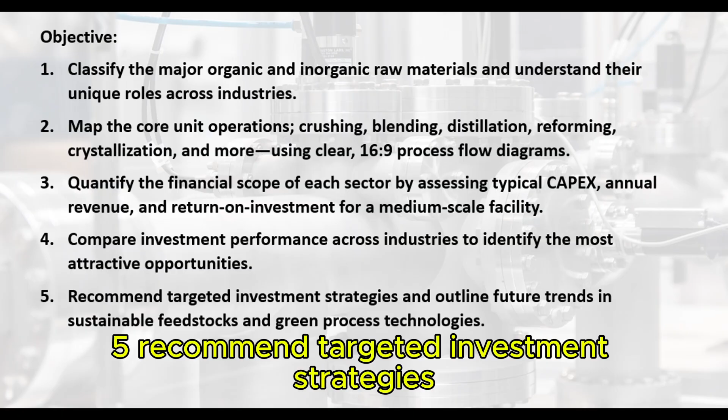3: Quantify the financial scope of each sector by assessing typical CAPEX, annual revenue, and return on investment for a medium-scale facility. 4: Compare investment performance across industries to identify the most attractive opportunities. 5: Recommend targeted investment strategies and outline future trends in sustainable feedstocks and green process technologies.

By the end of this video, you'll have a holistic understanding of both the chemistry and the economics that turn raw molecules into multi-million-dollar ventures, and the insights you need to make informed investment decisions in these critical sectors.

Expected core areas covered in this study are as shown in the outline below: 1.0 Raw Material Classification. 2.0 Agrochemicals Industries. 3.0 Petrochemicals Industries. 4.0 Cement Industry. 5.0 Food Industries. 6.0 Petroleum and Natural Gas Industries. 7.0 Evaluation of CAPEX, Revenue and Return on Investment of Industries. 8.0 Investment Strategies. 9.0 Conclusion and Future Outlook.

1.0 Raw Materials Classification. Raw materials are also known as feedstocks. Raw materials are the fundamental substances, natural or synthetic, that are introduced into a process to undergo chemical transformation. Raw materials could be classified into the following two classes.

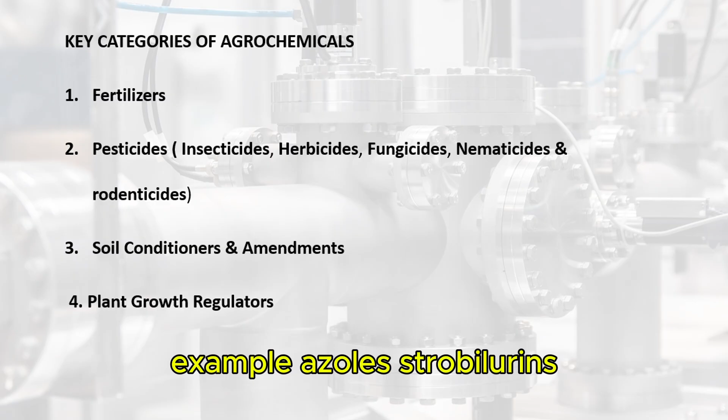2. Pesticides, grouped into the following. A. Insecticides control insect pests, e.g. organophosphates, pyrethroids, neonicotinoids. B. Herbicides suppress or kill weeds, example glyphosate, atrazine, 2,4-D. C. Fungicides prevent or treat fungal diseases, example azoles, strobilurins, copper compounds.

D. Nematicides and rodenticides target nematodes in soil and rodent pests. 3. Soil conditioners and amendments include: A. Lime (CaCO3) and gypsum (CaSO4), to adjust pH and improve soil structure. B. Organic amendments - compost, biochar, manure - to boost microbial activity and water retention.

4. Plant growth regulators. These are hormone-based chemicals that modify physiological processes: auxins for rooting, gibberellins for stem elongation, cytokinins for cell division, ethylene inhibitors. This section will be focused on the process of producing fertilizers.

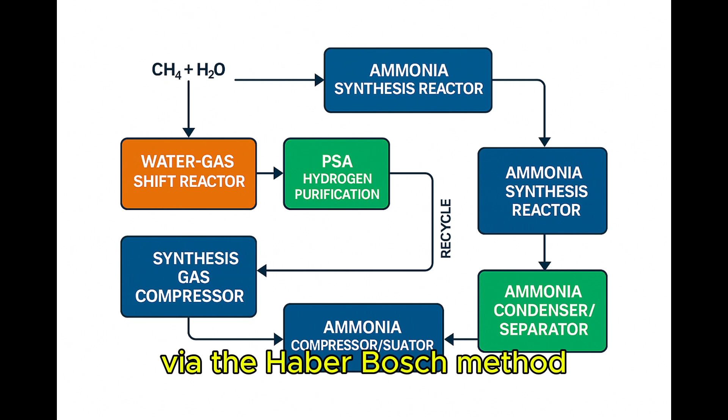2.1 Production of fertilizers. Production of fertilizers starts with the production of ammonia. In this study, we will consider the production of ammonia via the Haber-Bosch method. The process flow diagram here illustrates the production of ammonia via the Haber-Bosch method. Here's a concise breakdown of the key steps involved in the Haber-Bosch process for production of ammonia.

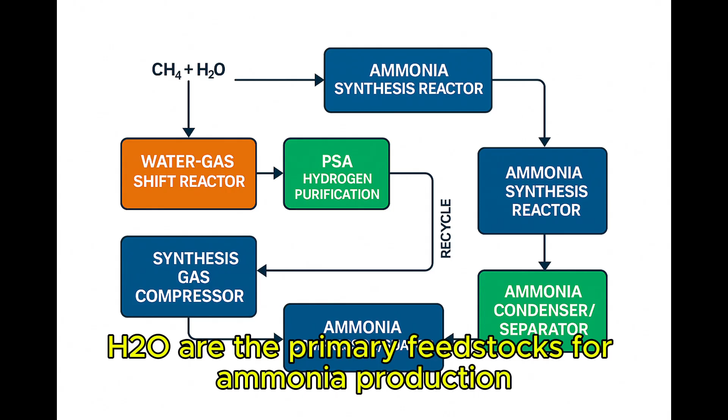Step 1: Feedstock preparation. Methane (CH4) and water (H2O) are the primary feedstocks for ammonia production. Methane is often derived from natural gas. Step 2: Water-gas shift reactor (WGS). Methane and water produce hydrogen gas and carbon monoxide as shown in reaction equation 1. This reaction helps produce hydrogen, H2, which is needed for ammonia synthesis.

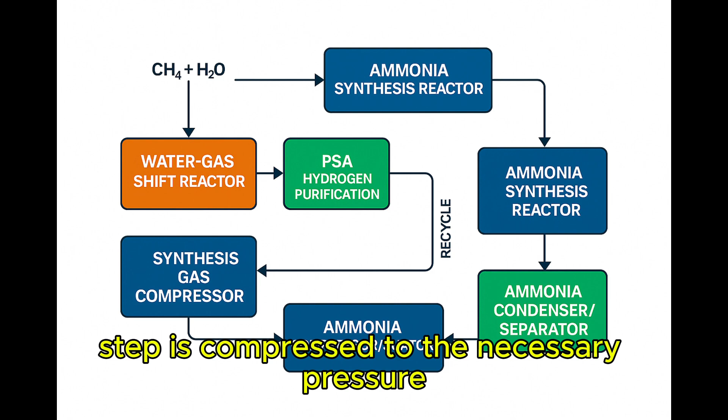Step 3: Synthesis gas compressor. The hydrogen gas produced in the previous step is compressed to the necessary pressure, around 200 to 300 bar, for the next stage in the process. Step 4: Pressure swing adsorption (PSA), hydrogen purification.

The hydrogen gas may contain impurities such as carbon dioxide, carbon monoxide, and nitrogen. The PSA system purifies the hydrogen by removing these impurities, leaving high-purity hydrogen for the ammonia synthesis process.

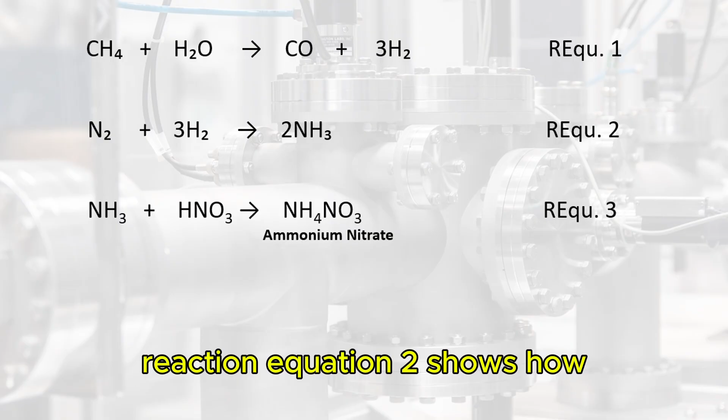Step 5: Ammonia synthesis reactor. Reaction equation 2 shows how ammonia is produced from nitrogen, sourced from the air, and hydrogen produced from methane. The purified hydrogen gas reacts with nitrogen at high temperature, 400 to 500 degrees Celsius, and high pressure, 200 to 300 bar.

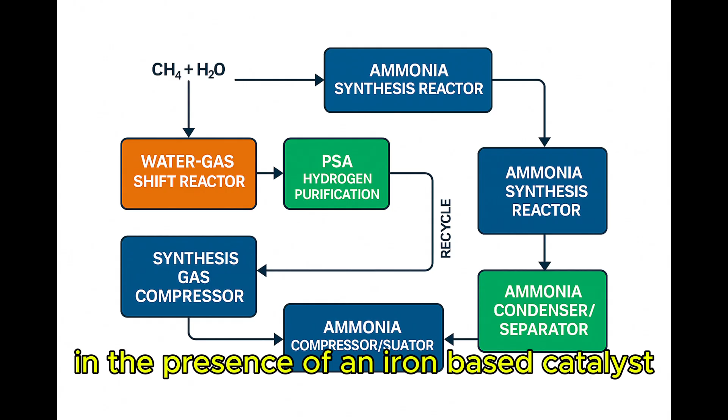Step 6: Ammonia compressor. The ammonia produced is compressed further to increase its density for easier separation and storage.

Step 7: Ammonia condenser/separator. The compressed ammonia gas is cooled in a condenser, where it condenses into a liquid. The separation unit then separates any unreacted gases, which are recycled back into the synthesis process, ensuring a continuous loop.

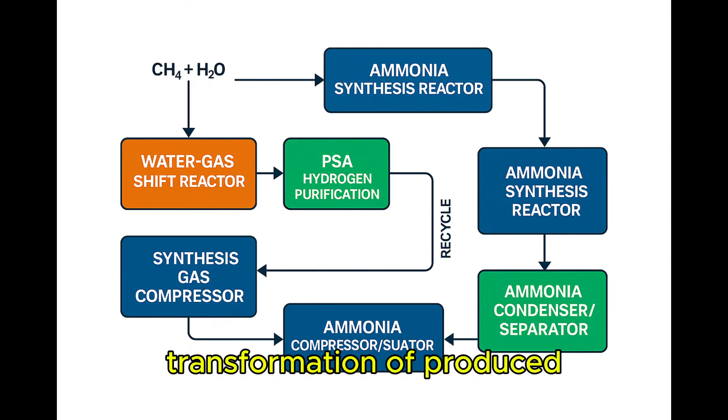2.1.1 Transformation of produced ammonia into various commercial fertilizers. Once ammonia is produced via the Haber-Bosch process, it is transformed into various commercial fertilizers through several additional processing steps. Below is a breakdown of how ammonia is used in the production of fertilizers.

1. Ammonium nitrate fertilizer. Here, ammonia is neutralized with nitric acid, HNO3, to produce ammonium nitrate, as shown in reaction equation 3, through the following production flow. Ammonia gas, NH3, is absorbed in water to form aqueous ammonia. Nitric acid, HNO3, is produced via the Ostwald process, oxidation of ammonia.

The aqueous ammonia reacts with concentrated nitric acid to form ammonium nitrate solution. The solution is then concentrated and cooled to produce solid ammonium nitrate crystals. The ammonium nitrate is either granulated or prilled for use as a high nitrogen fertilizer.

Uses of ammonium nitrate fertilizer: note that ammonium nitrate is widely used in fertilizers, high in nitrogen, and as an ingredient in explosives. 2. Urea fertilizer.

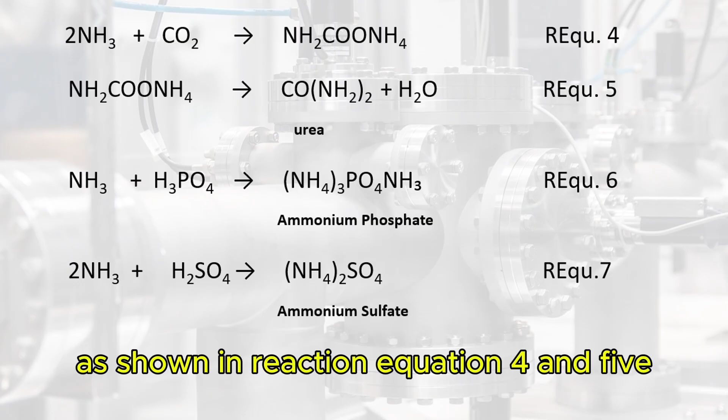Urea is produced by reacting ammonia with carbon dioxide, as shown in reaction equations 4 and 5, through the following production flow. Ammonia and carbon dioxide react at high pressure, 150 to 250 atm, and high temperature, 180 to 200 degrees Celsius, in a urea reactor. The reaction produces ammonium carbamate, which is then dehydrated to form urea.

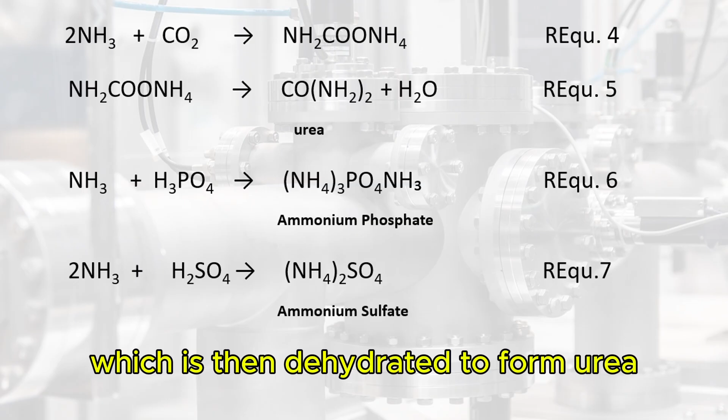The liquid urea is then prilled, formed into small pellets, or granulated. Urea is one of the most widely used nitrogen fertilizers, offering a high nitrogen content, 46% N. It's used in agriculture, horticulture, and turf care.

3. Ammonium phosphate. Here, ammonia is reacted with phosphoric acid, H3PO4, to produce ammonium phosphate, as shown in reaction equation 6, through the following production flow. Phosphoric acid is produced from phosphate rock, treated with sulfuric acid.

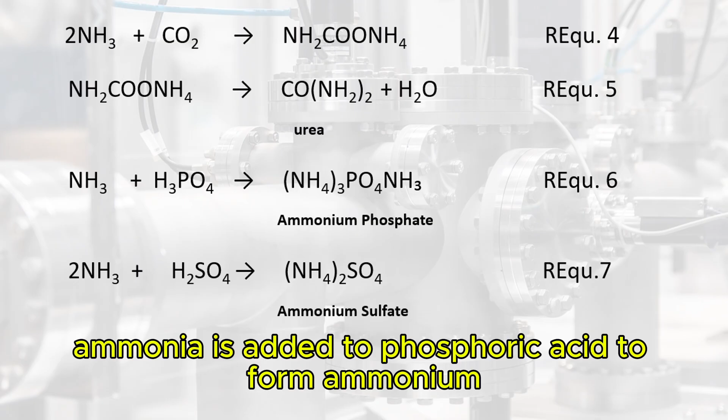Ammonia is added to phosphoric acid to form ammonium phosphate. The product is concentrated and then either granulated or prilled. Ammonium phosphate is a key source of both nitrogen and phosphorus, essential for plant growth. It is used extensively in granular fertilizers for crops.

4. Ammonium sulfate. Here, ammonia is reacted with sulfuric acid as shown in reaction equation 7, through the following production flow. Ammonia reacts with sulfuric acid in a reactor to form ammonium sulfate.

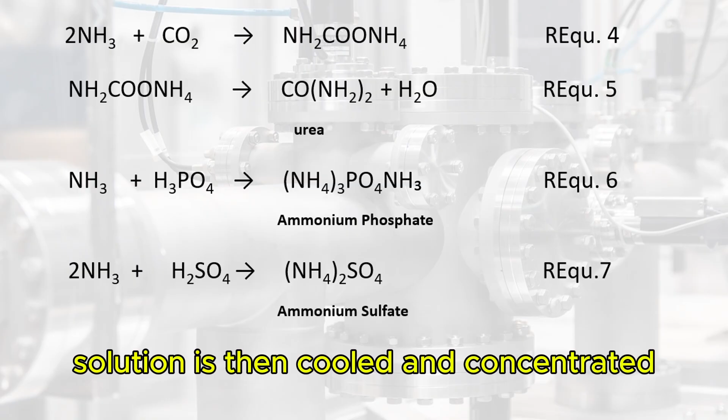The ammonium sulfate solution is then cooled and concentrated. It is either granulated or spray-dried into solid form. Ammonium sulfate fertilizer provides both nitrogen and sulfur, important for certain crops like maize and rice. It is used in agriculture, especially for soils needing sulfur.

5. NPK fertilizers: nitrogen, phosphorus, and potassium. NPK fertilizers are mixed blends of ammonia-based products, urea, ammonium nitrate, ammonium sulfate, with phosphate and potassium compounds. Through the following production flow, ammonia products like urea or ammonium nitrate are blended with phosphate-based fertilizers, such as superphosphate.

Potassium, typically potassium chloride or potassium sulfate, is added to the mixture. The blend is then granulated and coated for easy handling and application. Uses of NPK fertilizer: NPK fertilizers are commonly used to provide a balanced nutrient supply for plants, suitable for a wide range of crops.

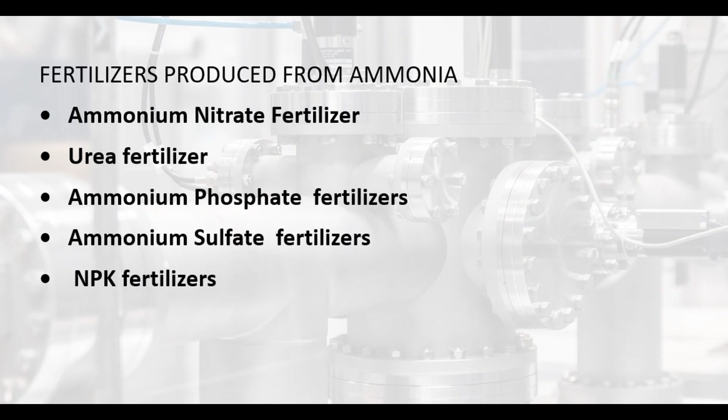3.0 Production of petrochemicals. Petrochemicals are chemical products derived from petroleum, crude oil, and natural gas, which are primarily composed of hydrocarbons. They serve as the raw materials for a wide variety of industrial processes and products. Petrochemicals are crucial in producing many everyday goods, including plastics, fertilizers, detergents, synthetic fibers, and fuels.

3.1 Classification of petrochemicals. Petrochemicals are generally classified into three main categories: first, second, and third generation petrochemicals. 3.1.2 First generation petrochemicals, or basic petrochemicals, are the products derived directly from cracking or distillation of crude oil and natural gas. They are often used as feedstocks in the production of more complex chemicals and materials. Examples are alkanes, ethylene, propylene, butadiene, and polymers from first-generation petrochemicals.

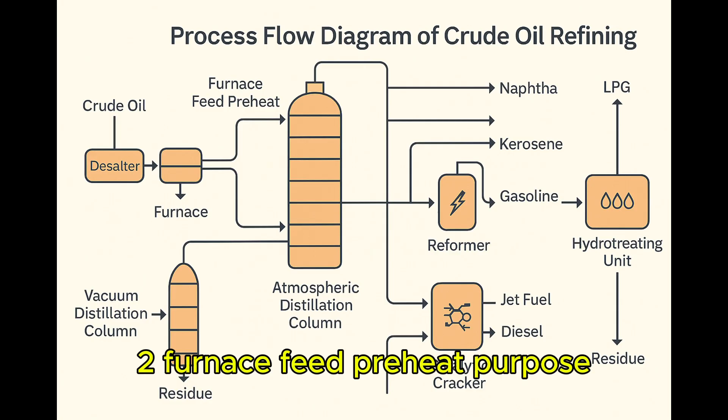2. Furnace, feed preheat. Purpose: raise the temperature of desalted crude to its boiling point range. How it works: crude passes through fired heaters, where it's heated to 350-380 degrees C before entering the distillation column.

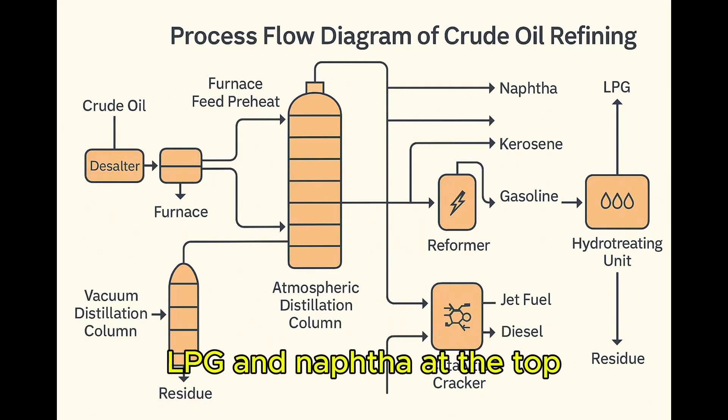3. Atmospheric distillation column. Purpose: fractionate crude into light and middle distillates at atmospheric pressure. How it works: as heated crude enters the bottom, vapors rise and condense at trays, LPG and naphtha at the top, kerosene and gas oil in middle draws, heavy bottoms exit for further processing.

4. Vacuum distillation column. Purpose: further separate the heavy atmospheric bottoms under reduced pressure to avoid thermal cracking. How it works: vacuum lowers boiling points so heavy fractions yield vacuum gas oil and vacuum residue without excessive cracking.

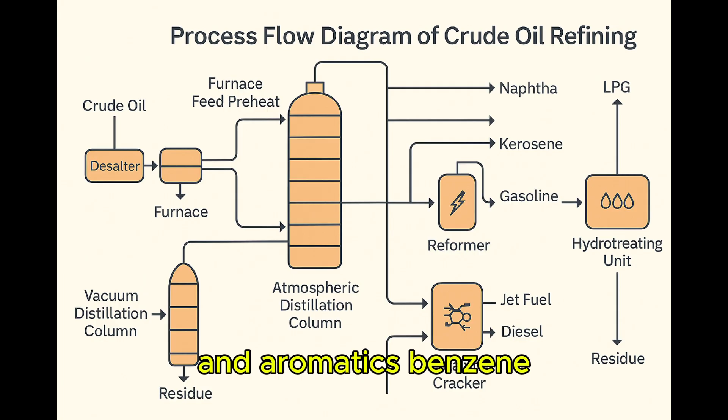5. Reformer, catalytic reforming unit. Purpose: upgrade low-octane naphtha into high-octane gasoline components and aromatics: benzene, toluene, xylene. How it works: naphtha mixed with hydrogen passes over a platinum-based catalyst at about 500 degrees C and 10 to 30 atm. Reactions include dehydrogenation, isomerization, and cyclization.

6. Catalytic cracker, fluid catalytic cracking, FCC. Purpose: crack heavier gas oils into lighter, high-value products: gasoline, diesel, propylene. How it works: under heat, about 500 degrees C, and a zeolite catalyst, large hydrocarbon molecules crack into smaller ones. The catalyst is continuously regenerated by burning off deposited coke.

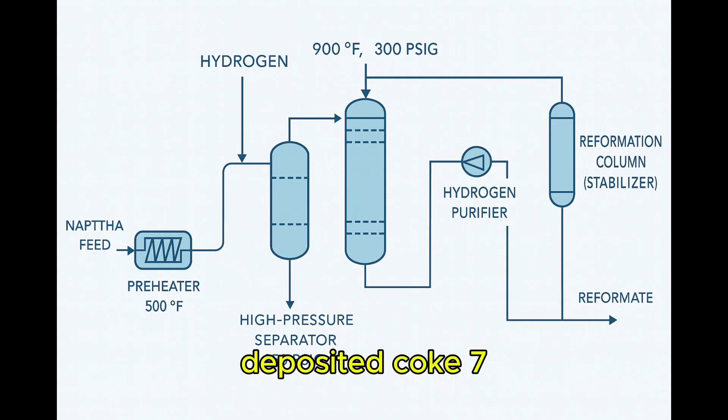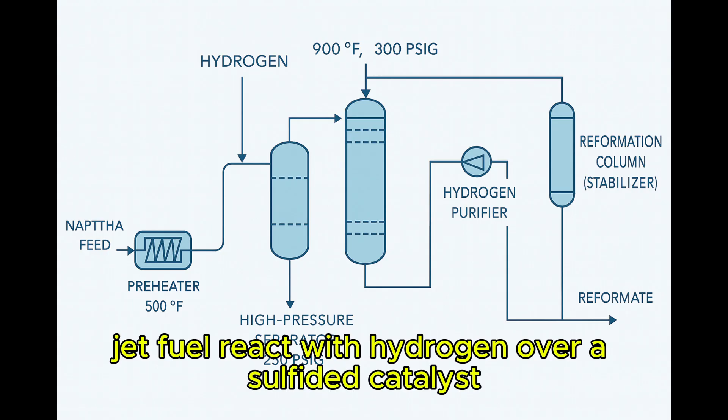7. Hydrotreating unit. Purpose: remove sulfur, nitrogen, and other heteroatoms to meet product specifications and protect downstream catalysts. How it works: distillate streams—gasoline, diesel, jet fuel—react with hydrogen over a sulfided catalyst at 300-400 degrees C, 30 to 100 atm, converting contaminants into H2S and NH3, which are then stripped out.

8. End product separation and storage. After upgrading, each fraction is stabilized, blended, and sent to storage: LPG from light ends, gasoline from reformer and FCC, kerosene/jet fuel and diesel from hydrotreating, and residue for asphalt or further conversion.

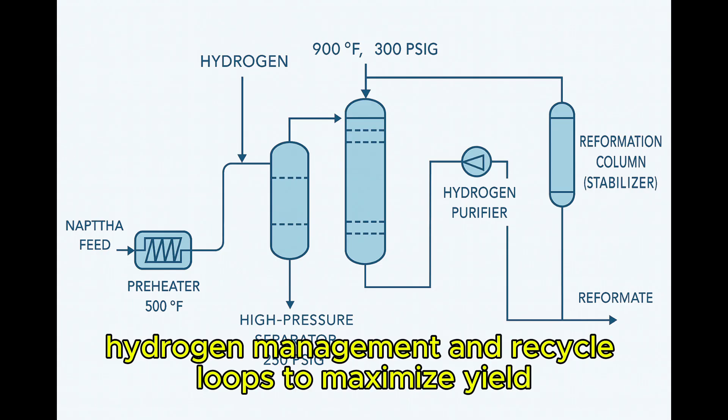Each of these steps integrates heat recovery, hydrogen management, and recycle loops to maximize yield, energy efficiency, and product quality.

3.2.2 Cracking. Cracking is a key process used to break down large hydrocarbons from heavier fractions into lighter, more useful chemicals like ethylene, propylene, and butadiene. This process is typically done using heat or catalysts.

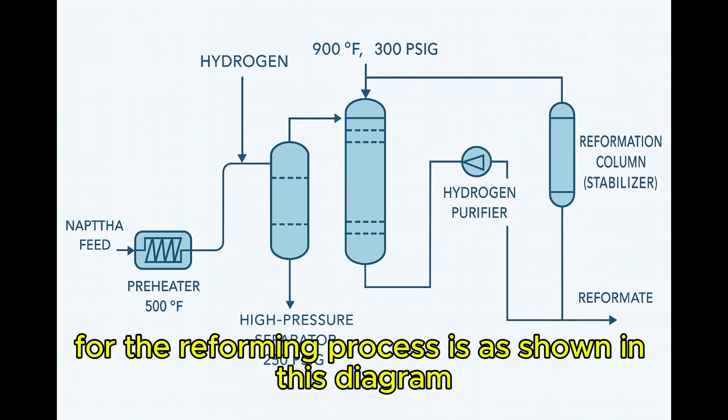3.2.3 Reforming. Process flow diagram for the reforming process is as shown in this diagram. Reforming in petrochemical production refers to a set of processes used to rearrange or alter the structure of hydrocarbons. It is widely used in refining and petrochemical manufacturing to convert lower-value hydrocarbons, like naphtha, into more valuable products, such as aromatics, olefins, or high-octane gasoline.

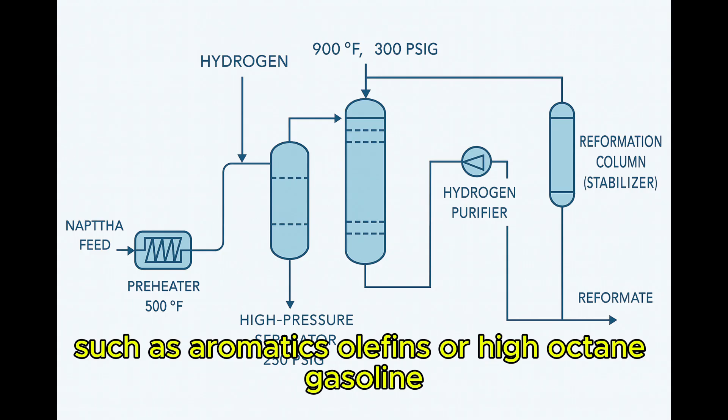There are several types of reforming processes, which include catalytic reforming, thermal reforming, and steam reforming, used in hydrogen production. Here's a concise rundown of what's happening in each major step of the reforming train.

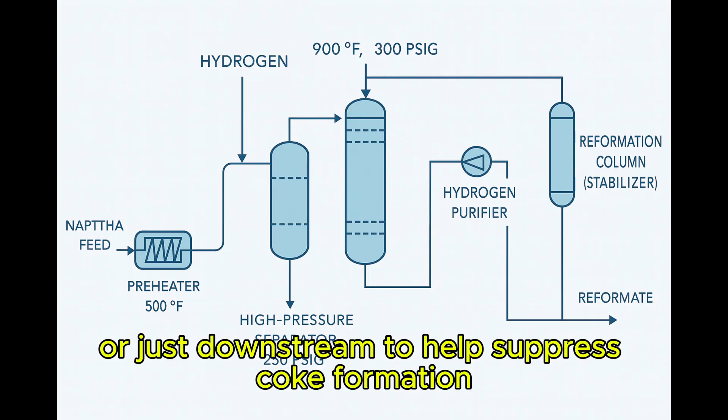1. Preheater. The naphtha feed is first heated to around 500 degrees Fahrenheit, so it's hot enough to drive the downstream reactions. Hydrogen is introduced here, or just downstream, to help suppress coke formation on the catalyst.

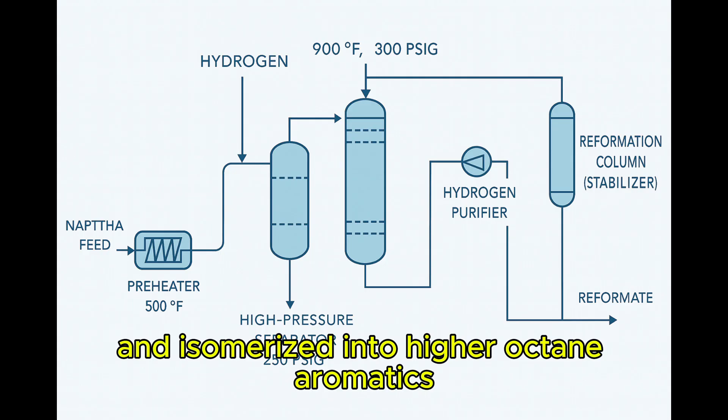2. Reactor section. The heated naphtha/hydrogen mixture passes through a series of fixed-bed reactors packed with reforming catalyst. At roughly 900 degrees Fahrenheit and 300 psig, paraffins and naphthenes are dehydrogenated and isomerized into higher-octane aromatics.

The chemical transformations in the reactor section are as shown in the reaction equations. These include: A. Dehydrogenation of naphthenes, shown in reaction equation 8. B. Dehydrocyclization of paraffins, shown in reaction equation 9. C. Isomerization of paraffins, shown in reaction equation 10. D. Minor hydrocracking, shown in reaction equation 11.

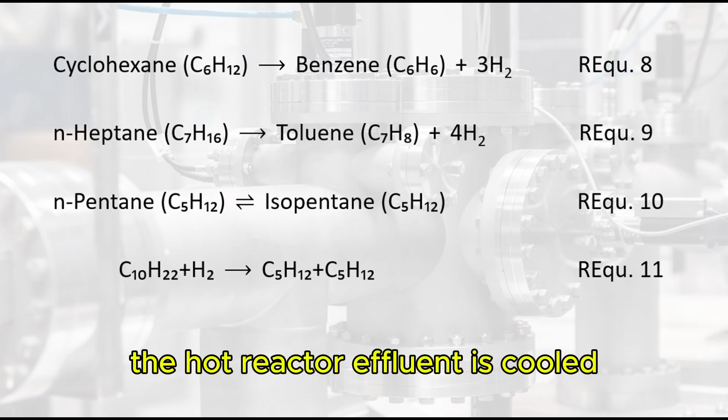These reactions boost octane by forming aromatics and branched isomers and liberate hydrogen, which is then recycled back to the reactor. 3. Effluent cooler and high-pressure separator. The hot reactor effluent is cooled so that the hydrogen-rich gas and liquid hydrocarbons can be split, typically at 250 psig.

The gas, mostly H2, goes off for purification and recycle. The liquid proceeds on for stabilization.

4. Hydrogen purifier and recycle compressor. Any hydrocarbon vapors are scrubbed out of the separated gas, then the clean hydrogen is recompressed and sent back to the reactor inlet. 5. Reformation column, stabilizer.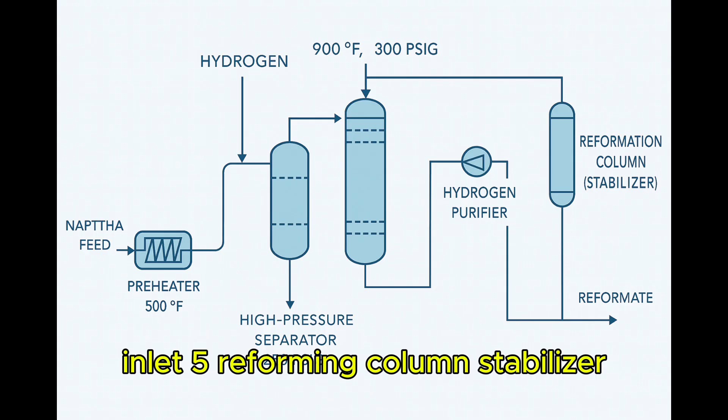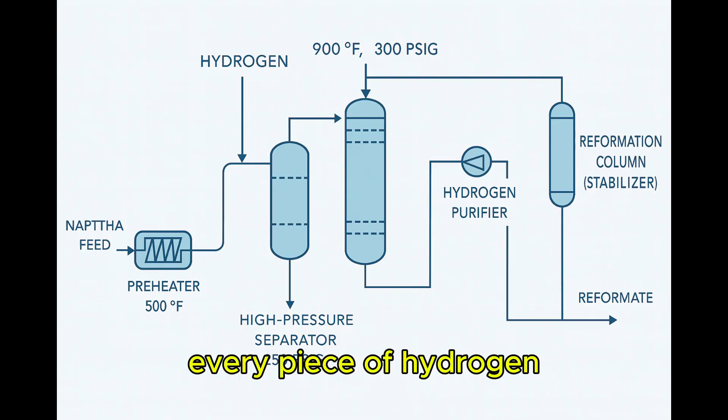The liquid effluent is fractionated to remove light ends, C4, and any unconverted naphtha boiling below the desired cut. The stabilized bottoms, now a high-octane Reformate, are sent on as a gasoline component or petrochemical feed. Every bit of hydrogen not consumed in dehydrogenation is recycled, and the Reformate product boasts a much higher octane number thanks to the formation of aromatic rings.

3.2.4 Polymerization. The monomers, such as ethylene, propylene, derived from cracking are then chemically bonded together via polymerization to form polymers, e.g., plastics, synthetic rubber.

3.2.5 Formulation. Formulation in petrochemical production refers to the process of combining various chemical components, often derived from petrochemicals, to create end products with specific characteristics and properties tailored for particular applications. Unlike pure petrochemicals, like ethylene or propylene, which are single compounds, formulation involves blending multiple chemicals to create complex mixtures or products that meet certain performance standards.

Key aspects of formulation in petrochemicals are: blending involves mixing petrochemical raw materials, such as solvents, resins, or additives, in precise proportions. Additives like stabilizers. 4.0 Production of cement.

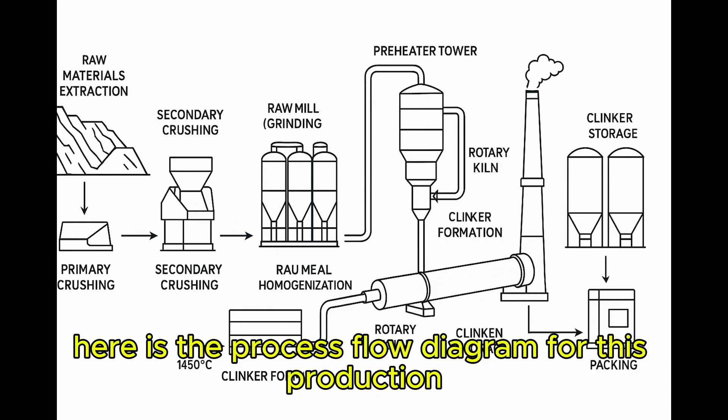Cement is a critical component in construction, enabling the creation of durable and versatile structures. Here is the process flow diagram for this production. The processes are as described below.

1. Raw materials extraction. Cement production begins with the extraction of raw materials, primarily limestone, CaCO3, clay, sand, and other minerals. These materials are quarried and transported to the cement plant.

2. Crushing and grinding. The raw materials are crushed and ground into a fine powder, known as raw meal, to increase their surface area and facilitate chemical reactions.

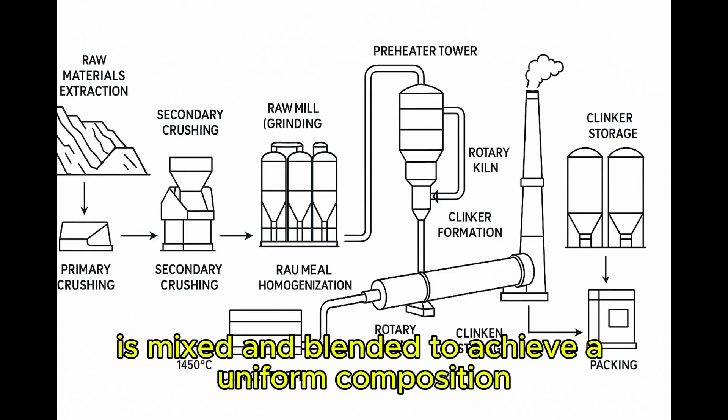3. Mixing and blending. The raw meal is mixed and blended to achieve a uniform composition, ensuring consistent quality of the final product. 4. Preheating and calcination.

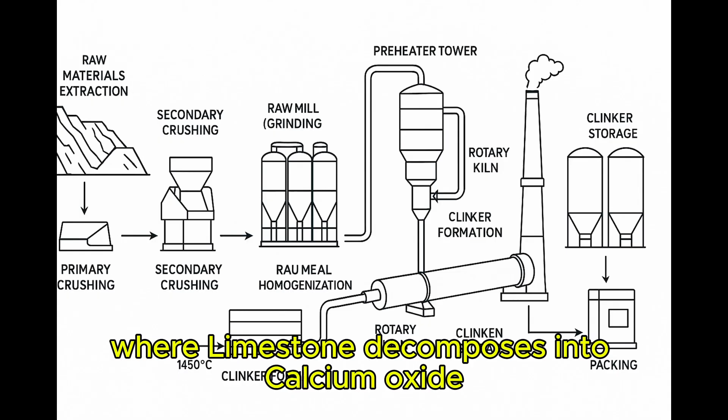The raw meal is preheated to about 900 degrees Celsius, driving off moisture and volatile compounds. It then undergoes calcination, where limestone decomposes into calcium oxide, CaO, and carbon dioxide, CO2, as shown in reaction equation 12. 5. Clinker formation. The preheated raw meal enters a rotary kiln, where it is heated to about

1450 degrees Celsius, forming a nodular material called clinker. This process involves complex chemical reactions, including the formation of calcium silicates and aluminates, as shown below. A. Formation of tricalcium silicate or alite as shown in reaction equation 13.

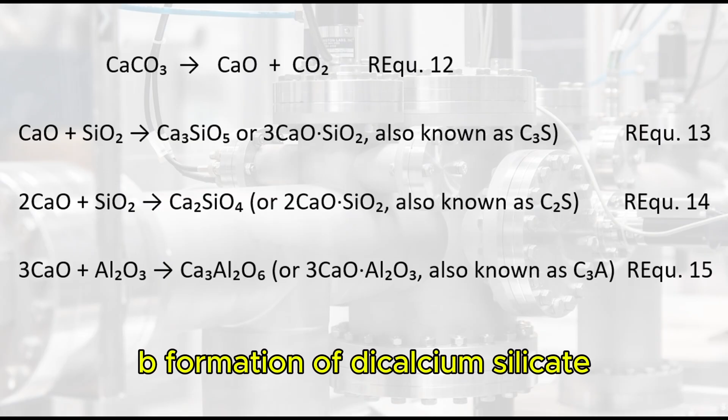B. Formation of dicalcium silicate or belite as shown in reaction equation 14. C. Formation of tricalcium aluminate as shown in reaction equation 15. These reactions involve the combination of calcium oxide, CaO, with silicon dioxide, aluminum oxide, Al2O3, and other compounds at high temperatures, around

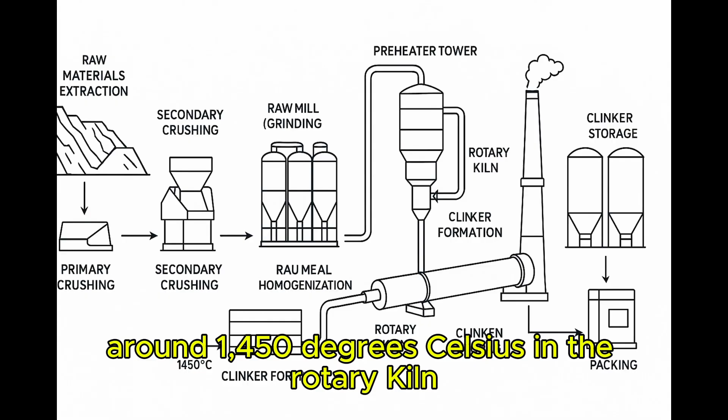1450 degrees Celsius, in the rotary kiln, forming the main minerals present in cement clinker. 6. Cooling and storage. The clinker is cooled and stored in silos.

7. Final grinding. The clinker is ground with gypsum, CaSO4, 2H2O, and other additives to produce cement powder. 8. Packaging and distribution. The final product is packaged and distributed to construction sites, ready for use in concrete production.

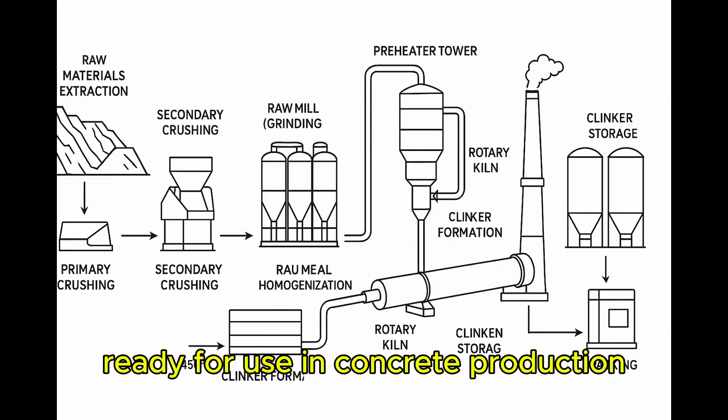Note that this process involves a combination of physical and chemical transformations, requiring careful control of temperature, composition, and processing conditions to produce high-quality cement.

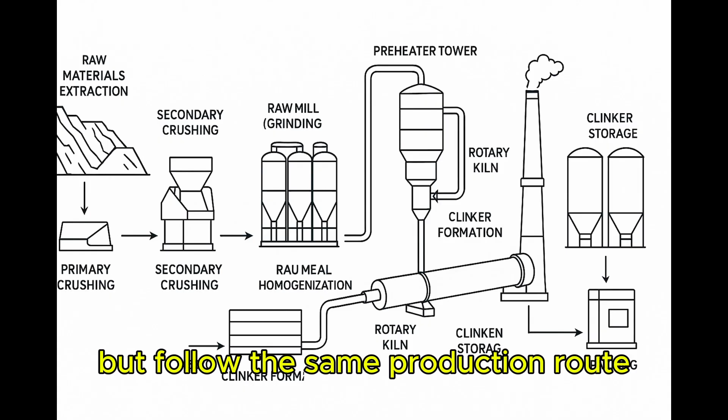There are several types or classes of cements, including Portland cement, blended cement, specialized cements, masonry cement, hydraulic cement, blended hydraulic cement. These have varied raw materials as feed in the production process but follow the same production route. The varied types cater to various construction needs, environmental conditions, and performance requirements.

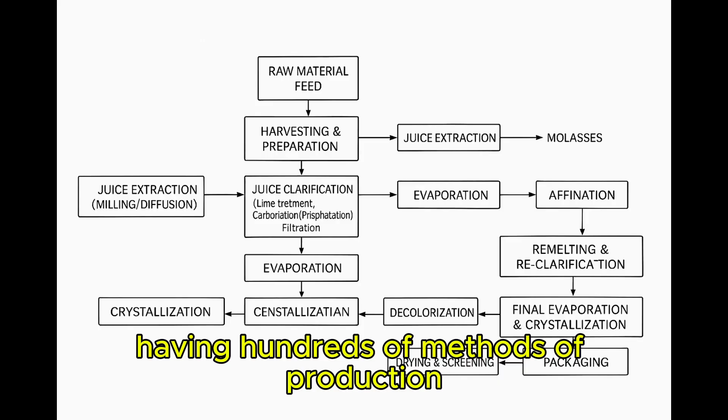5.0 Food Industry, Table Sugar and Table Salt Production. In the food industry, production processes are very wide, with even a particular food having hundreds of methods of production. So, we will deal with the process of producing table salt and table sugar that are widely used food ingredients.

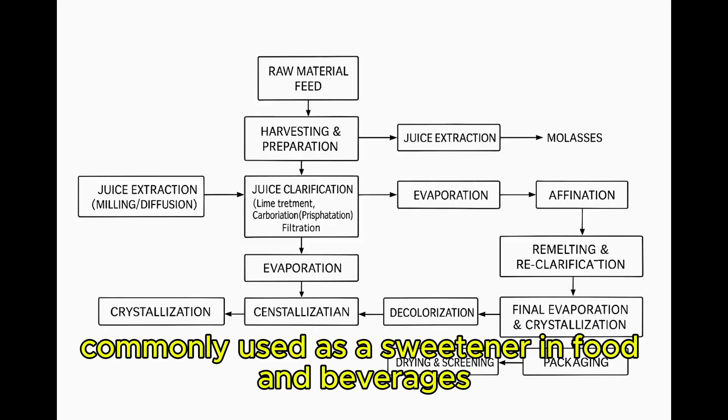5.1 Production of table sugar. Table sugar, also known as sucrose, is a disaccharide carbohydrate composed of glucose and fructose molecules bonded together. Its chemical formula is C12H22O11. Table sugar is a white, crystalline solid commonly used as a sweetener in food and beverages.

The process flow diagram of table sugar production is shown here and described as follows.

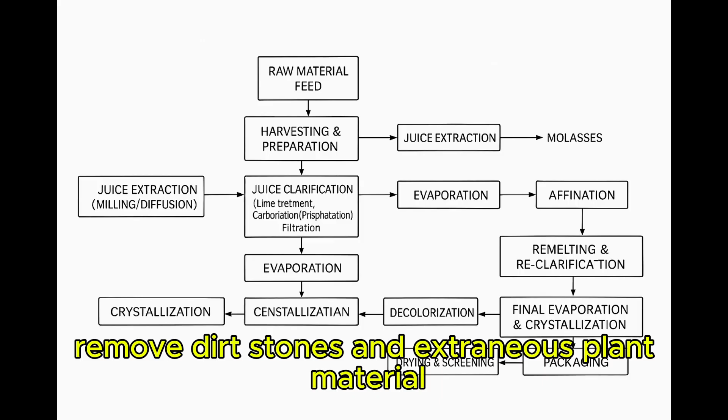A. Harvesting and preparation. 1. Harvest: cane fields are cut mechanically or by hand, and stalks are transported to the mill. Beet roots are lifted from the ground, topped, washed, and brought to the factory. 2. Cleaning and sizing: remove dirt, stones, and extraneous plant material. Cane is shredded, beets are sliced into thin cossettes.

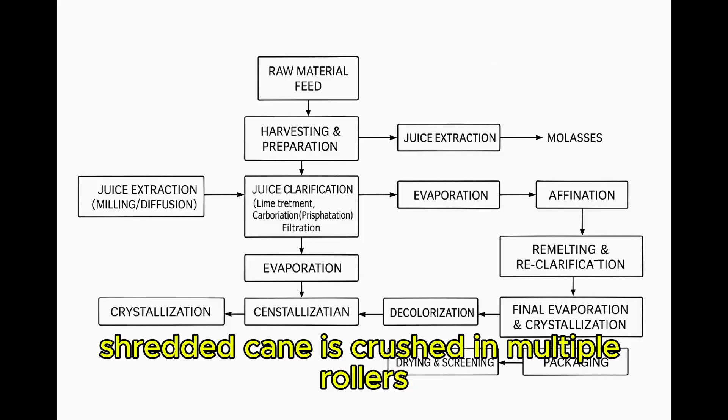B. Juice extraction. 1. Diffusion, beet: cossettes pass through a countercurrent diffuser where hot water leaches sucrose. 2. Milling, cane: shredded cane is crushed in multiple rollers, releasing sugar-rich juice.

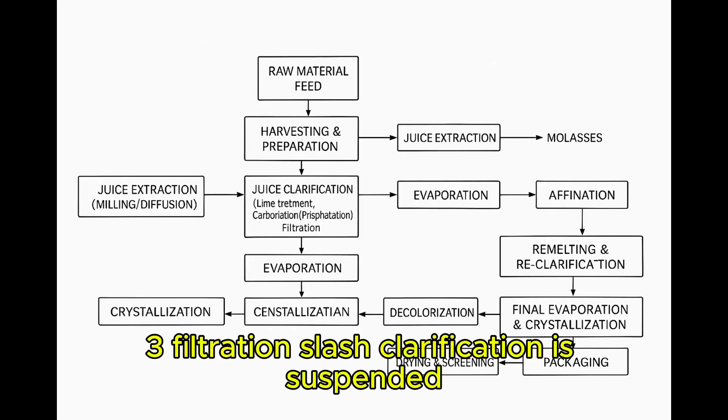C. Juice clarification. 1. Lime and heat treatment: juice is limed with calcium hydroxide and heated to precipitate impurities, proteins, and coloring matter. 2. Carbonation or phosphatation: CO2, or phosphoric acid plus lime, is bubbled through to form flocs that carry impurities out. 3. Filtration/clarification: suspended solids, mud, are removed by settling and filtration.

D. Evaporation: clarified juice is passed through multiple effect evaporators, concentrating it to a syrup of 60–65% solids. E. Crystallization, raw sugar.

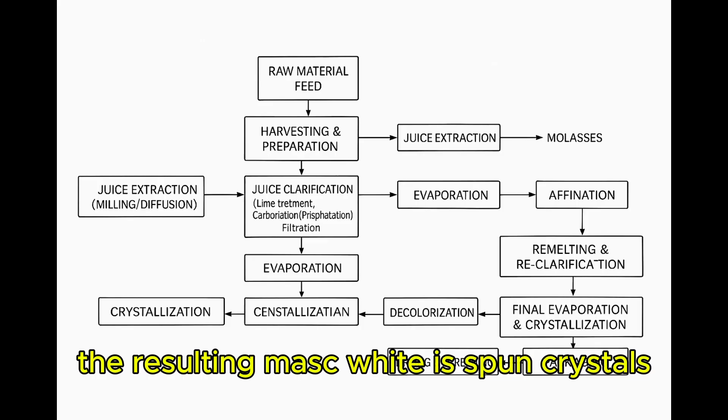1. Vacuum pans: syrup is seeded with fine sugar crystals and boiled under vacuum to supersaturate. 2. Centrifugation: the resulting massecuite is spun, and crystals, raw sugar, separate from mother liquor, molasses. 3. Molasses: mother liquor is either further crystallized to make brown sugar or sold as molasses.

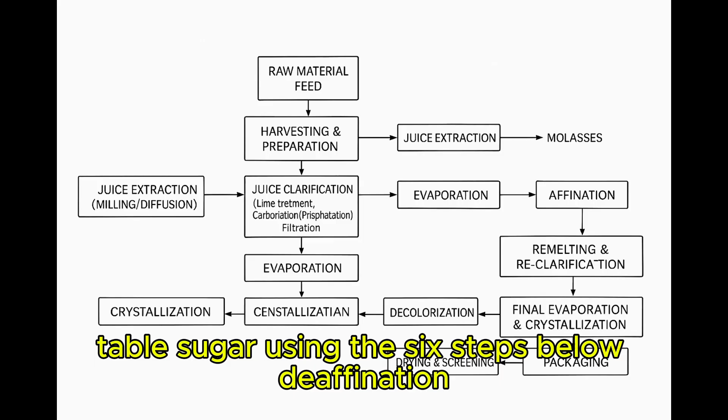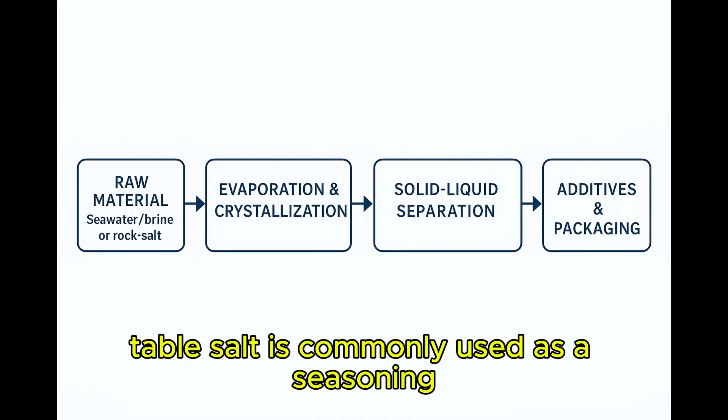5.2 Production of table salt. Table salt, also known as sodium chloride, is a crystalline mineral composed of sodium (Na) and chlorine (Cl) ions. Its chemical formula is NaCl. Table salt is commonly used as a seasoning and preservative in food, and it's essential for various bodily functions, such as maintaining fluid balance and nerve function.

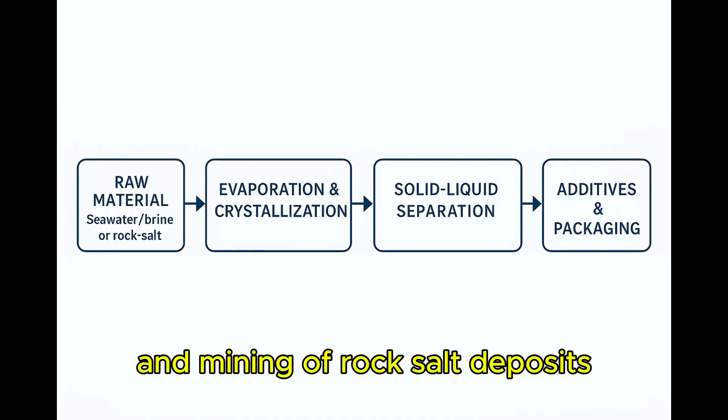Commercial table salt is produced at scale by two main routes: evaporative processes from brines or seawater, and mining of rock salt deposits, followed by refining, doping (e.g. iodization), anti-caking treatment, and packaging.

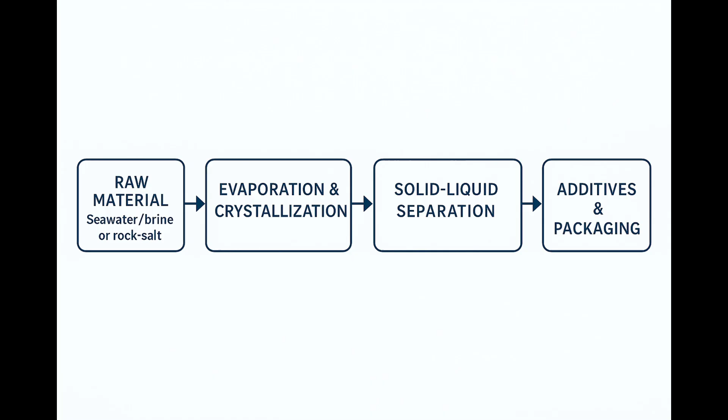5.2.1 Flow description of the production of table salt. The flow description is shown in this diagram, described as follows. 1. Sources and purification of raw materials. Source: either natural brine/seawater, solar or vacuum evaporated, or mined rock salt. Preparation: brine is screened for solids; rock salt is crushed and, if needed, dissolved to form a concentrated brine.

2. Concentration. Evaporation: brine is evaporated via sunlight in ponds or by heating under vacuum until salt solubility is exceeded. Nucleation and growth (crystallization): the supersaturated solution forms NaCl crystals, whose size can be controlled by seeding, temperature, and evaporation rate.

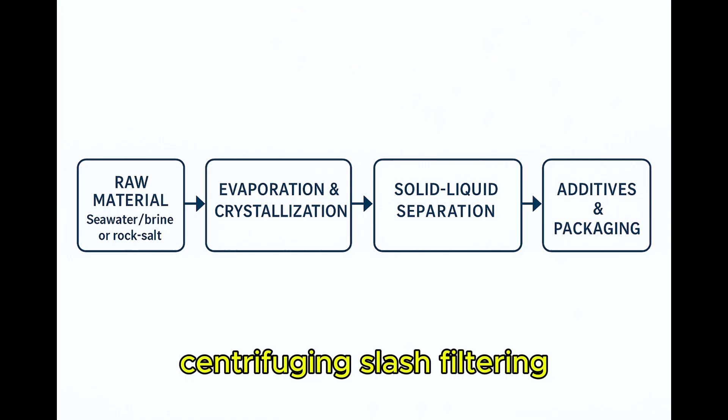3. Solid-liquid separation. Centrifuging/filtering quickly spins or filters out the salt crystals from the remaining mother liquor. Washing and drying: crystals are rinsed with saturated brine to remove impurities, then dried, e.g. in hot air dryers, to reduce moisture to less than 0.5%.

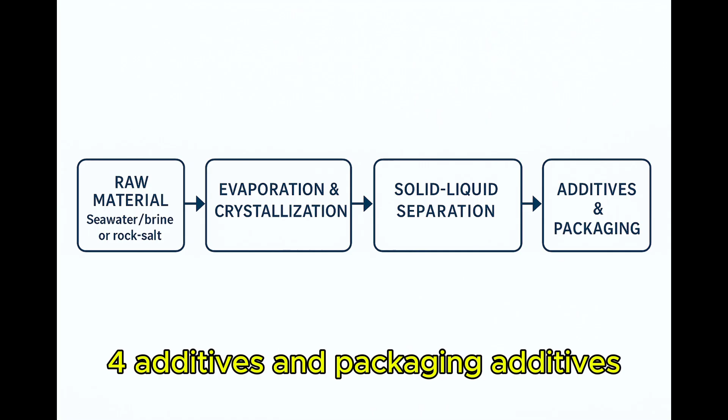4. Additives and packaging. Additives: small doses of anti-caking agents, e.g. calcium silicate, keep the salt free-flowing. Iodizing salt with potassium iodate/iodide combats iodine deficiency. Packaging: the finished salt is screened to grade, then bagged or boxed for retail table salt, or bulk for industrial users.

6.0 Petroleum, crude oil, and natural gas upstream production industries. Seismic survey and drilling operations usually precede crude oil and natural gas production. Seismic survey involves carrying out geophysical surveys and mapping subsurface structures to identify areas with commercial amounts of petroleum and natural gas, while drilling operations involve forcing through the subsurface at very high depth to access petroleum and natural gas.

Petroleum, or crude oil, is a complex mixture of hydrocarbons and other organic compounds. It's a viscous, dark-colored liquid found beneath the Earth's surface, extracted through drilling. Crude oil is a fossil fuel used as a primary energy source and feedstock for producing various petroleum products.

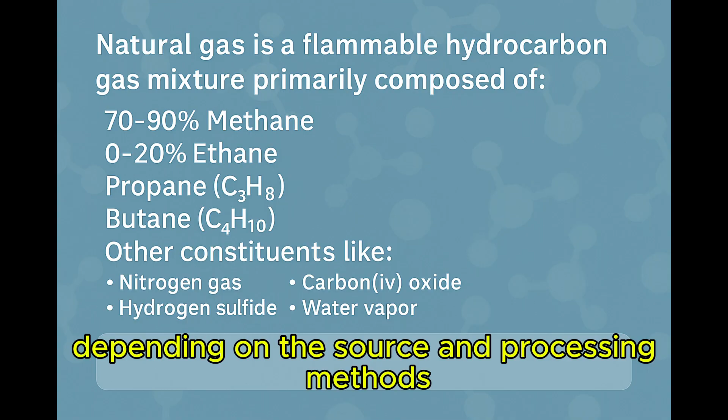Natural gas is a flammable hydrocarbon gas mixture primarily composed of 70 to 90% methane, 0 to 20% ethane, propane (C3H8), butane (C4H10), and other constituents like nitrogen gas, carbon dioxide, hydrogen sulfide, and water vapor. Its composition may vary depending on the source and processing methods.

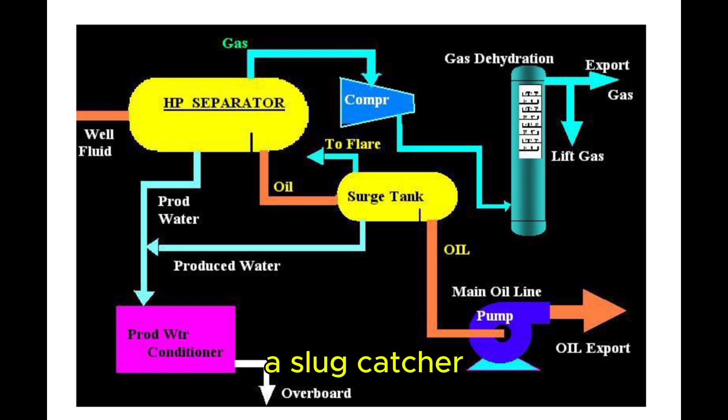A. Inlet equipment and surge knockout. A slug catcher/knockout drum handles intermittent surges and slugs of liquid and gas. Inlet chokes regulate upstream pressure to optimize separation.

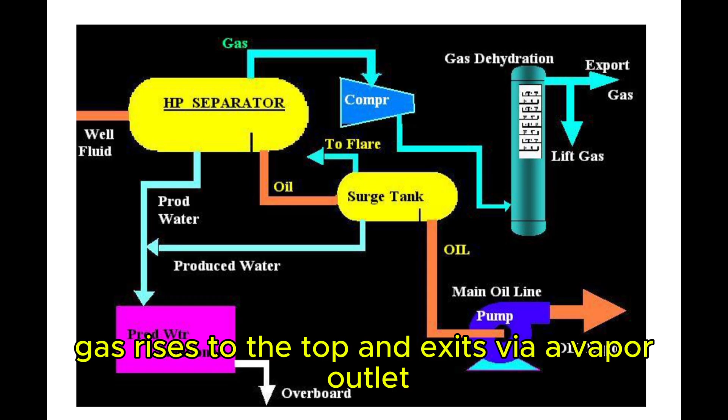B. Three-phase separator. This is the HP separator shown here, a vertical or horizontal vessel operating at an intermediate pressure, e.g. 100 to 300 psig. As the mixture slows down under reduced pressure, gas rises to the top and exits via a vapor outlet. Oil, of intermediate density, forms a middle layer and is drawn off as stabilized crude. Water, the heaviest, sinks and is removed from the bottom.

Key internals and controls include baffles and weirs to minimize re-entrainment, level controllers to maintain separate interface levels for oil and water, and a pressure control valve on the vapor outlet to hold the vessel pressure set point.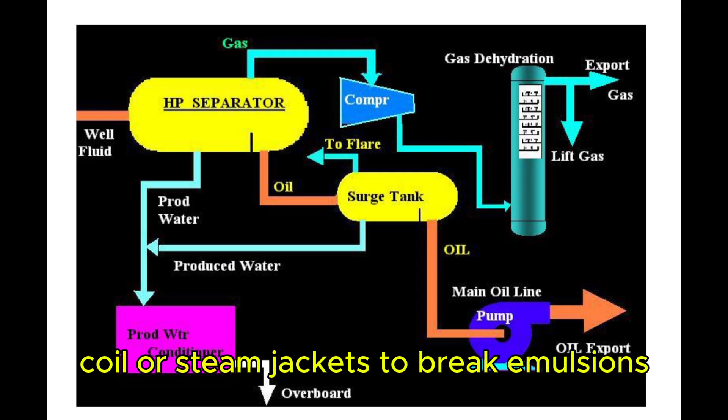C. Heater treater, if needed. Some separators include a heating coil or steam jackets to break emulsions and improve the water-oil split.

D. Dehydration/desalting, optional at this stage. Electrostatic desalter: wash crude with fresh water and apply 5-10 kV to coalesce and drop out residual salts and water. This protects downstream refinery furnaces and catalysts.

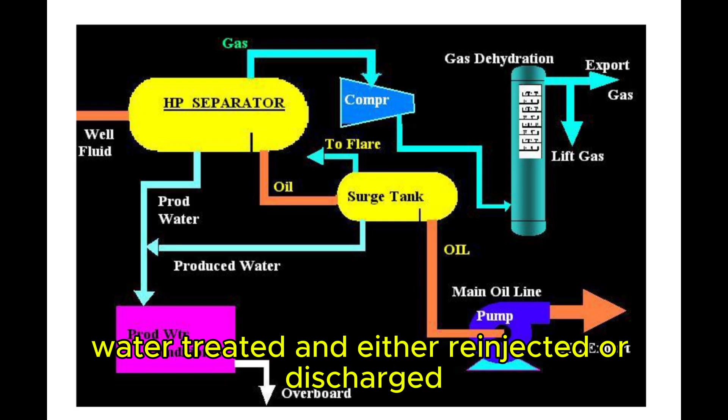E. Offtakes and routing. Stabilized crude oil, with gas less than 2 vol%, is sent to storage or pipeline. Produced water is treated and either re-injected or discharged under environmental permits. Natural gas is transferred to the gas production units.

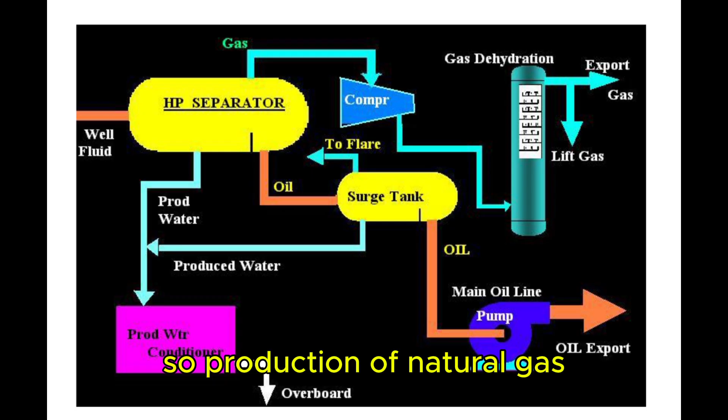6.2. Production of natural gas. Utilization of natural gas is compulsory as provided by regulations in most countries where crude oil is produced. So production of natural gas may be an integrated or a standalone facility in oil-field operations. The stages involved in production of natural gas are outlined as follows.

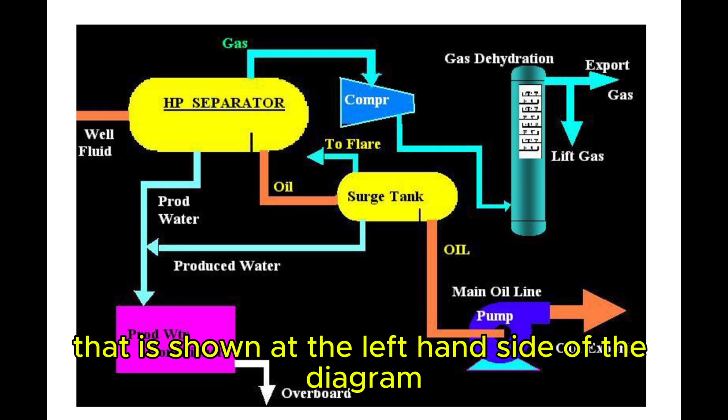1. Dehydration. This involves the use of desiccants like alcohols, particularly triethylene glycol, to absorb water from the natural gas stream so as to achieve an amount of water less than or equal to 7 pounds per million standard cubic feet. This is carried out at the cylindrical vertical separator shown on the right-hand side of the diagram. Note that some other processes use molecular sieve as a dehydrating agent through the technique of adsorption.

2. Regeneration of desiccants. The dehydrating agents, alcohol or molecular sieves, are not usually thrown away after use; they are rather recycled to pure forms and reused. This operation occurs downstream of the gas dehydration system, although it is not shown in this diagram.

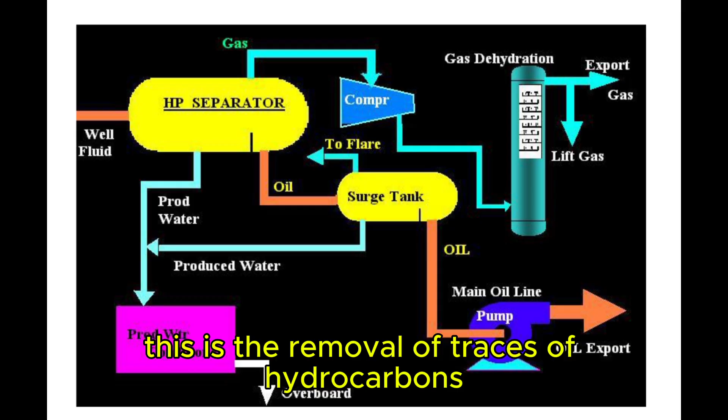3. Dew pointing. This is the removal of traces of hydrocarbons in the form of liquids from the gas stream. This ensures that the hydrocarbon dew point is less than or equal to -15 C. This could be done using the Joule-Thomson unit or a mechanical refrigeration system.

4. Other activities include removal of carbon dioxide and hydrogen sulfide from the gas stream.

7.0. Evaluation of CAPEX, revenue and return on investment of the industries discussed here.

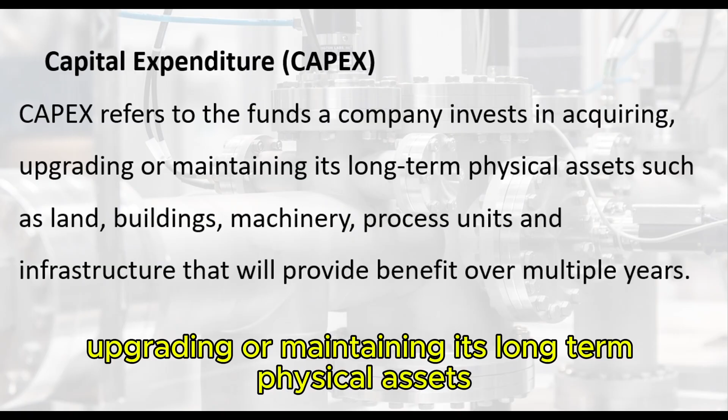This will enable the investor to have an overview of the extent of financial commitments that will be required to start these investments.

7.2. Average revenue generated by medium investment in the selected industries. Revenue is the total income earned by a business or organization from its normal operations, such as sales of goods or services, before deducting expenses. It's a key indicator of a company's financial performance and growth.

Revenue can be evaluated using various metrics, including: 1. Total revenue, total income from all sources. 2. Revenue growth rate, percentage change in revenue over time. 3. Revenue per unit, revenue generated per unit sold or service provided. 4. Average revenue per user, ARPU, revenue generated per user or customer.

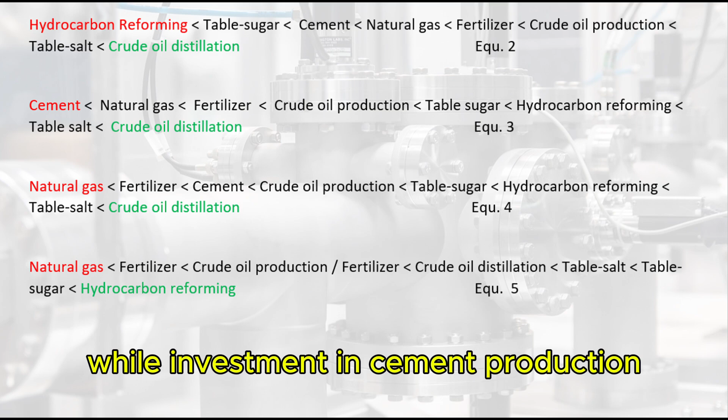the least revenue. Presenting the data in increasing order of net profit earned, as shown in equation 4: natural gas fertilizer, cement, crude oil production, table sugar, hydrocarbon reforming, table salt, crude oil distillation. This shows that crude oil distillation into different hydrocarbon substances generates the most net profit, while investment in natural gas

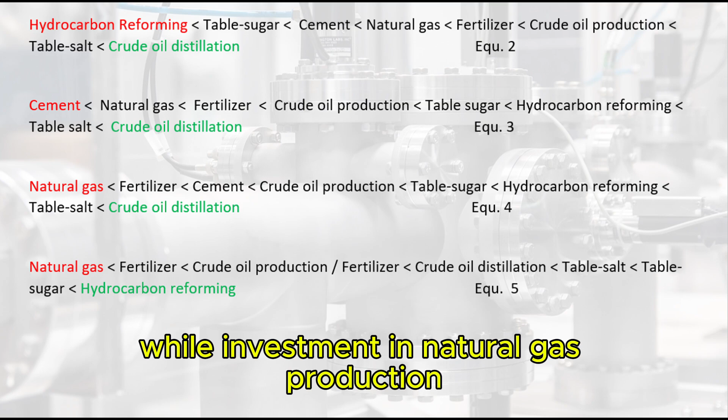production generated the least. Presenting the data in increasing order of return on investment, as shown in equation 5: natural gas fertilizer, crude oil production / fertilizer, crude oil distillation, table salt, table sugar, hydrocarbon reforming. This shows that hydrocarbon reforming attracts the highest return on investment, while investment in natural gas production attracted the least.

The economic trends of these processes, as shown, inform that an investment with the highest CAPEX may possibly generate the highest revenue, as in the case of crude oil refinery and table salt production in equations 2 and 3. It shows that the net profit earned could also be a function of the amount of CAPEX invested, as seen for crude oil distillation and table salt production, in a similar way to revenue generation.

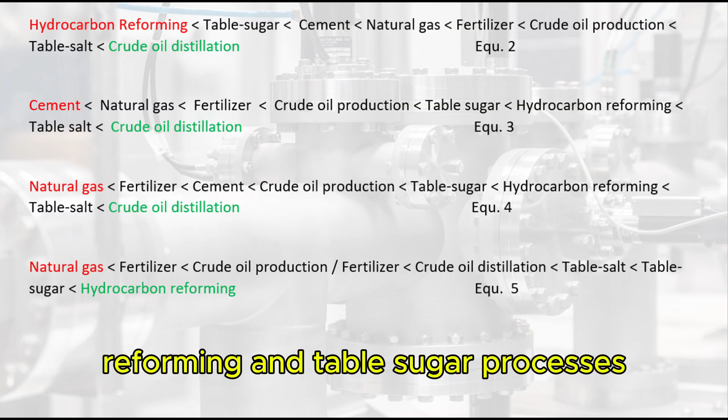As shown in equations 2 and 4, this in-depth review has shown that investments with least CAPEX attract the highest ROI, as in the case of hydrocarbon reforming and table sugar processes, as shown in equations 2 and 5. This is not to say the investment with the least amount of CAPEX are more lucrative than those with highest

amount of CAPEX. This could be investigated by evaluating the capital turnover in the assessment, where capital turnover is a financial metric that measures the efficiency of a company's use of capital in generating sales or revenue, calculated as shown in equation 7. This explains that the accumulated sales in subsequent years of investment, 2, 3, 4, etc., will enhance

far higher capital turnover ratio for investment with higher CAPEX, compared to those with lower CAPEX. This is because the total CAPEX for each of the investments compared in the analyses will remain the same, so this emphasizes the rule of investments that states: the higher the risk, the higher the reward, a truism.

Nevertheless, investment in processes with lower CAPEX gives investors the opportunity to generate revenue and upscale to more lucrative investments with higher CAPEX. Natural gas production in equations 4 and 5 shows the least net profit as well as ROI.

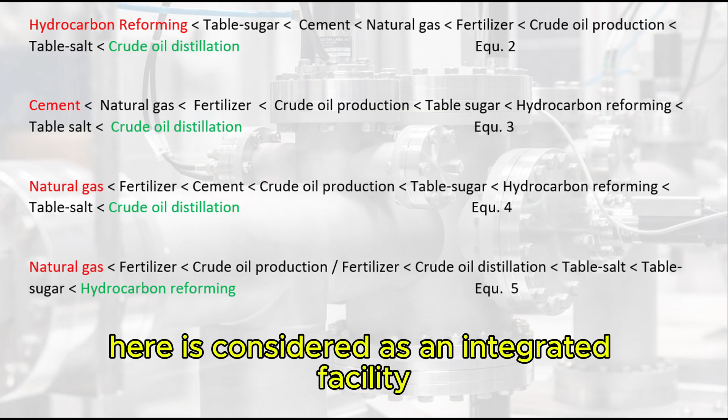So, if the oil and gas facility here is considered as an integrated facility, the net profit will be $165 million annually and a ROI of 89%, making the integrated facility have the same CAPEX as the single value for crude oil production alone, and higher in ROI than the investment in cement and fertilizer productions that were previously

higher, when crude oil and natural gas productions were considered as independent investments. Hence, the reason most upstream natural gas investments fail when producing from solely non-associated gas wells or reservoirs.

Conclusion and Future Outlook. Industrial raw materials may be viewed to be insignificant and tiny, molecular forms, in their unutilized states. Yet, they are the substances by which strategic processing transforms them to millions and billions and trillions of dollars. The choice of investment to engage these materials in production could generate revenue, transform the world, and create enormous value.

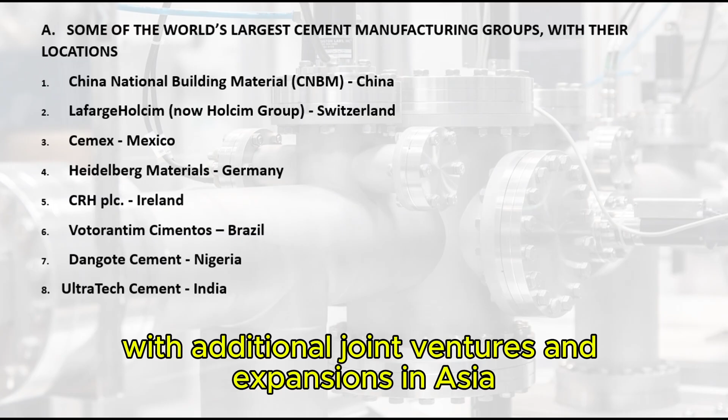Selected industries in the world that are involved in these productions. A: Cement production. Here are some of the world's largest cement manufacturing groups, with their headquarters and principal production locations.

1. China National Building Material, CNBM. HQ: Beijing, China. Operates the largest network of cement plants across mainland China, with additional joint ventures and expansions in Asia, the Middle East and Africa.

2. Lafarge-Holcim, now Holcim Group. HQ: Rapperswil-Jona, Switzerland. Over 350 cement plants in 70-plus countries across Europe, the Americas, Africa, and Asia.

3. Cemex. HQ: Monterrey, Nuevo Leon, Mexico. Manufactures and distributes cement in more than 50 countries, with major plants in the US, Europe, Latin America, and Asia.

4. Heidelberg Materials, formerly Heidelberg Cement. HQ: Heidelberg, Germany. Runs 130 cement plants in over 50 countries, from Europe and North America through to Southeast Asia and Africa.

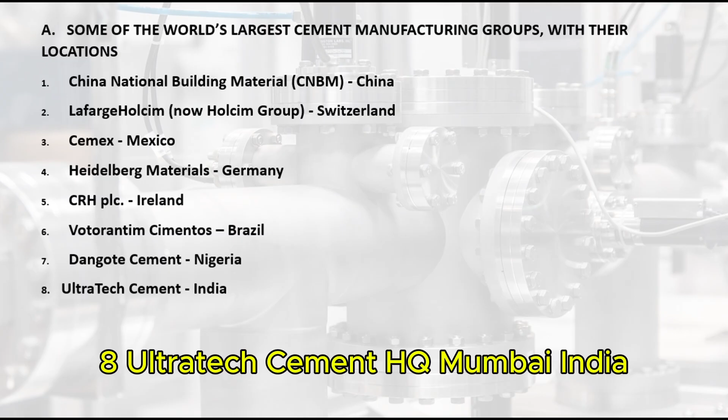6. Votorantim Cimentos. HQ: São Paulo, Brazil. 50 cement production units in Brazil and plants or terminals in Argentina, the US, Canada, Chile, Peru, Morocco, Tunisia, and Turkey.

7. Dangote Cement. HQ: Lagos, Nigeria. Africa's largest producer, with integrated plants in Nigeria, Obajana, Ibese, Gboko, plus subsidiaries and terminals in Ghana, Cameroon, Senegal, Tanzania, and Ethiopia.

8. Ultratech Cement. HQ: Mumbai, India. India's biggest cement maker, with an installed capacity of 152.7 MTPA, operating 23 integrated plants and 116 grinding units across India.

B: Crude oil refining. Here are 10 of the world's leading crude oil refining players, each operating large atmospheric distillation units, and where they're based.

1. China Petroleum and Chemical Corp., Sinopec. HQ: Beijing, China. Flagship units: Maoming, Shanghai refineries, each greater than 300 kbd.